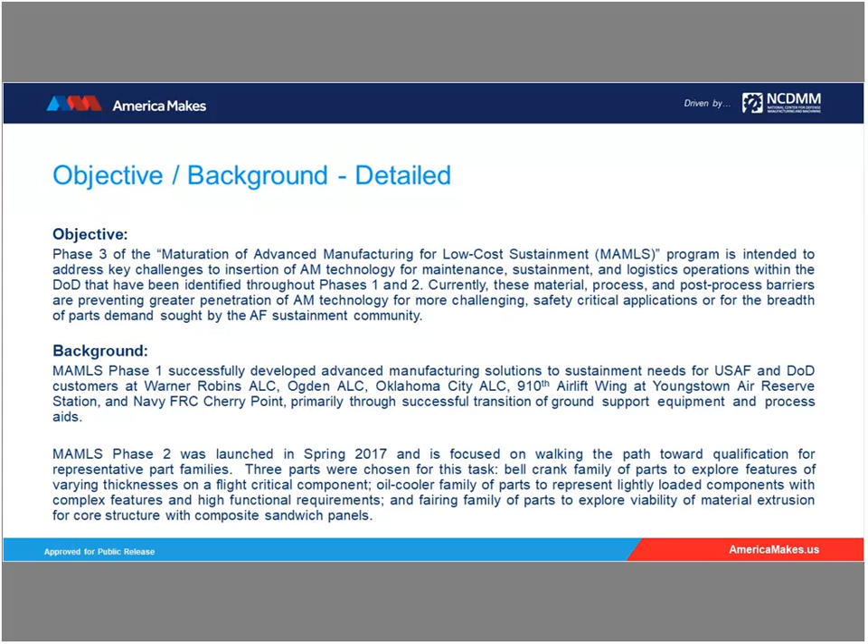All of this is really a baseline of what has been done to date, what the project is focused on, and just a couple more overall objectives.

The project is focused on demonstration of AM and advanced manufacturing technologies for replacement parts, for maintenance of legacy aircraft, things of that nature; identification of current technology and how it aligns to gaps within the maintenance, repair, overhaul, and sustainment communities, and what the transition issues are related to that, and finally how we demonstrate those technologies into that community.

So the key here for everyone who hasn't been engaged, and hopefully you pick this up through the evaluation criteria within the RFP, is that there's a need for your project concept to be related specifically back to a need within the sustainment community, within the DoD supply chain, something that will ultimately affect our ability to keep aircraft, vessels, and DoD systems up and operational moving forward.

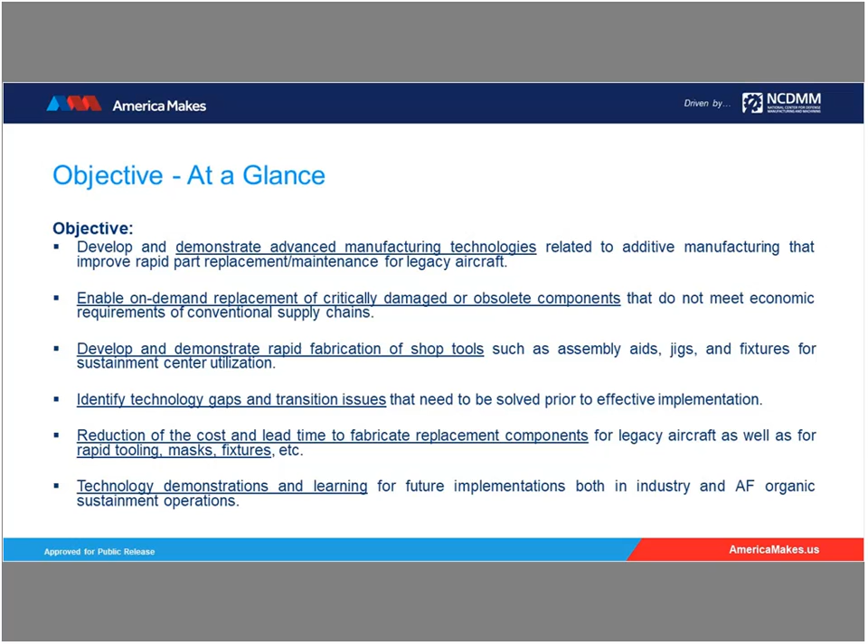So I will now go through the high-level technical topics. We'll address questions near the end, most likely, but we'll go through the individual technical topics first, primarily explaining the text buried within the RFP. We'll make sure any specific question that comes in is captured and documented so everyone gets access to the same information. Some questions may be referred back to the RFP for now, and if additional clarification is needed, it will be done via a written response.

The three overall topics right now are: topic one is feature-based qualification for, or using, directed energy deposition. The not-to-exceed amount of a proposed idea is $2.5 million in federal funding.

Topic two is understanding manufacturing realities of AM, specifically the effects of defects in powder bed systems, and that is not to exceed $1 million in federal funding.

Topic three is emerging process technologies for low criticality part families. Funding available for an individual award is not to exceed $600K. Each of the amounts in the right-hand column are not-to-exceed amounts for an individual project concept submission, and each does have a cost share requirement.

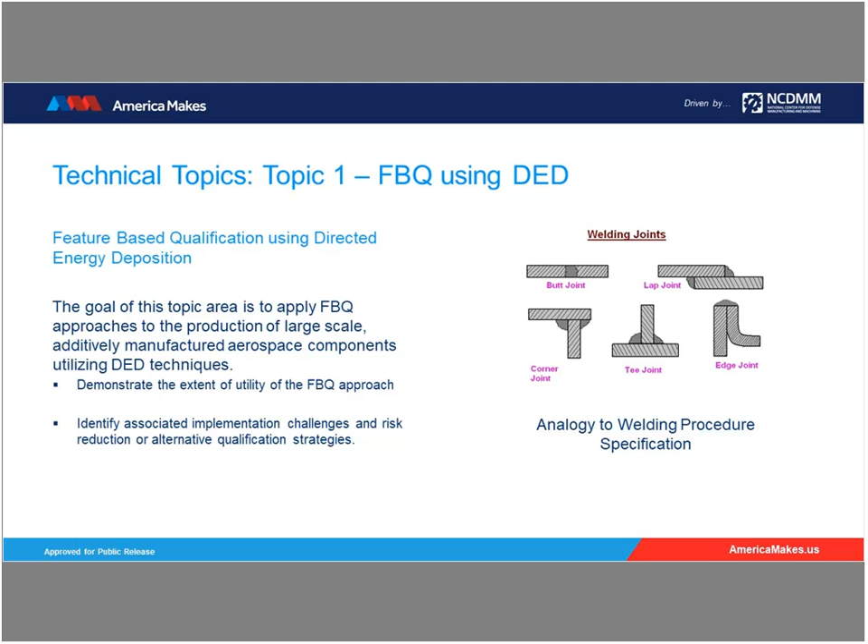There's some additional detail captured within the RFP. If there are more specific questions, you can type those on the right-hand side, and we'll make sure those get captured as answers that we share with the entire community. Within the next few days, we'll have our first list of questions out for everyone.

One note, and this slide, similar to this, exists for each of the 3 topical areas. We're going to put this out within the Q&A in the first batch that goes out. There is an alignment to the DoD roadmap for each of the 3 topics that has been captured by the Air Force. You'll see here in this first example reference to 4 different DoD AM roadmap elements that the effort is connected to.

This is not an exclusive list. This is not the only thing we're intending for a team to focus on, but these are tech elements connected from the DoD road mapping efforts that America Makes led about a year and a half ago, and this is a direct connection to that. You can see a reference to these specific roadmap elements within the DoD roadmap, posted on the America Makes website. There's a link there to the final report where you can get more detail about what each of these individual roadmap elements include.

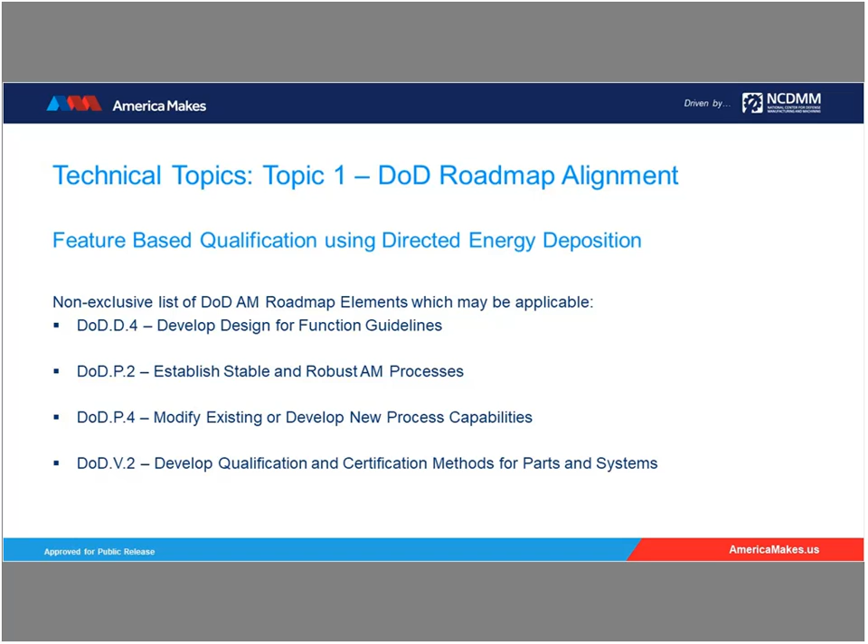So we have this for each of the three topics. I won't go into that detail on the remaining two.

The next topic, topic 2, on this slide labeled Effects of Defects, is really about understanding manufacturing realities of AM. We all know there's a variety of reasons that product or parts produced using AM are scrapped from time to time. There are lots of different root causes that could cause the need to scrap a part, from powder contamination, process interruptions, unremoved powder, rough finishes, volumetric flaws, lack of fusion, all the things we know could take place within a build.

Characterization of the flaws and the mechanical performance based on those flaws - we still don't have a great handle on what it means to have those built within a component. What it means to be located in a certain place, what it means to have defects in close proximity to one another. There's a lot still unknown in this space, and what we're really looking for here is to have the project teams putting forward proposals identify and quantify those effects of defects on mechanical performance.

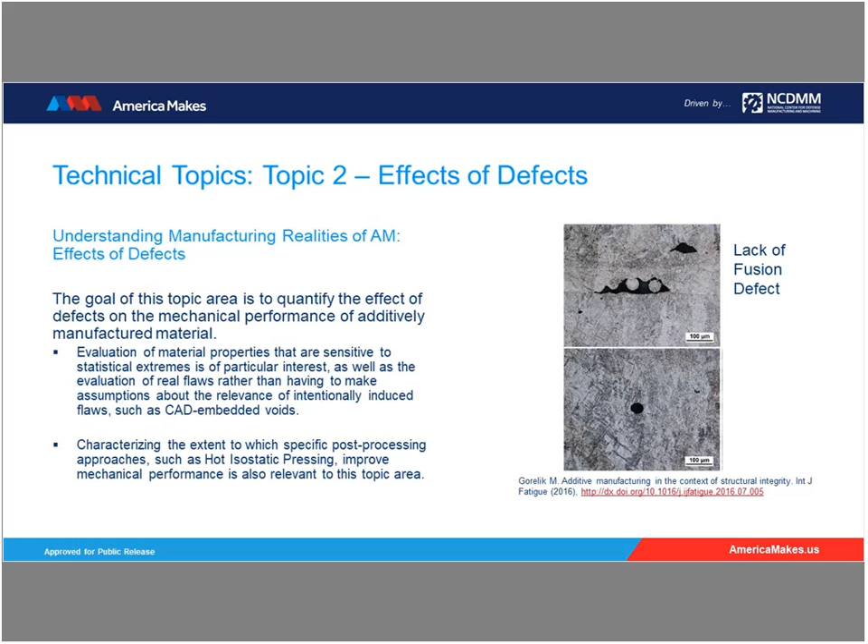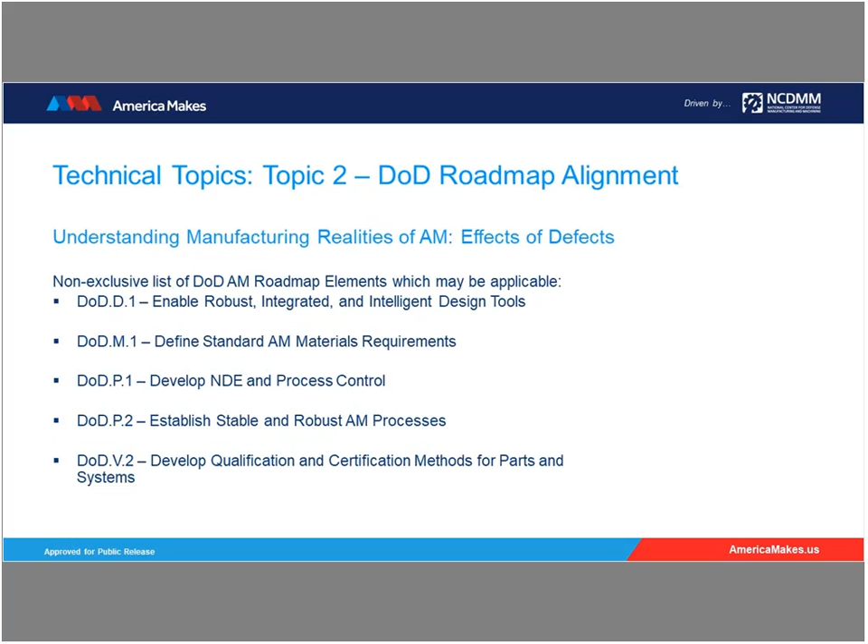Again, you'll see in this next slide - and we'll post each of these specific roadmap elements on the Q&A in the next batch that comes out - these are 5 specific roadmap elements that have been captured in the RFP.

The third technical topic is focused on emerging processes, and specifically we're looking for emerging processes for low criticality part families. We know AM is being utilized and has the opportunity to be implemented in a variety of different applications. In particular, AFRL is seeking to assess the degree to which new technologies are able to be introduced into parts of low criticality.

So in particular, there's a number of different things that have been called out here, but there are a number of the F42 processes that have not been heavily investigated through America Makes or through a variety of channels, that we would like to have teams put forward project concepts on. And this is probably the most open topic.

There's a variety of processes that people could propose against. It's really up to the team to identify the area of application, why it's of value, the potential impact. In particular, when you think forward to the full proposal phase, it's critical to understand how likely it is to transition the proposed idea to the Air Force, the organic base, and how likely it is to have an impact on the DoD supply chain.

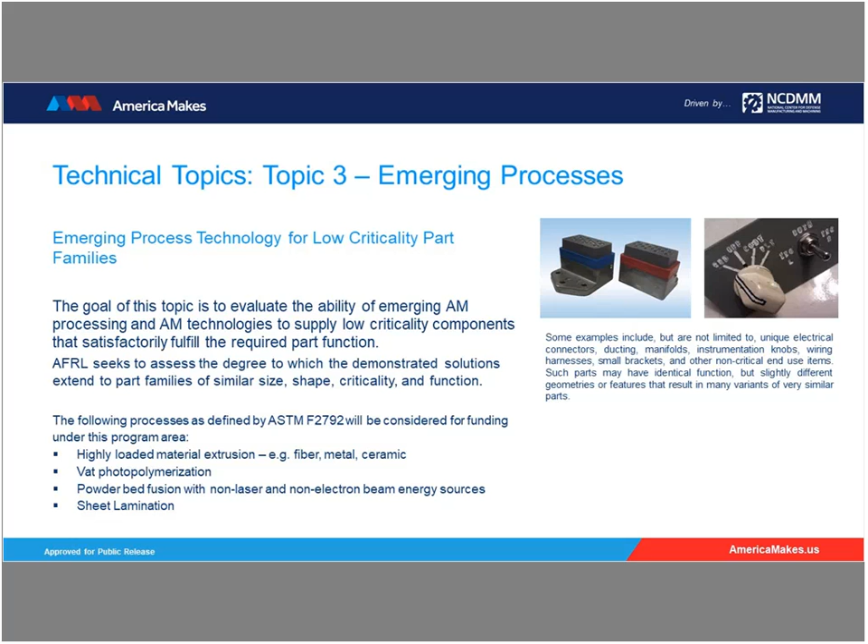So it's something every team needs to keep their head around as they're building project concepts, is what is the ultimate end-use application space, how does it tie back to the Air Force's needs, and how does it potentially impact the DoD supply chain. So in this topic in particular, a lot is on the table.

And we'll respond to that and post it for everyone to see. So I'm going to hand it back over to Erin, and she's going to walk through some of the programmatics about how this call will, some of the details of the call.

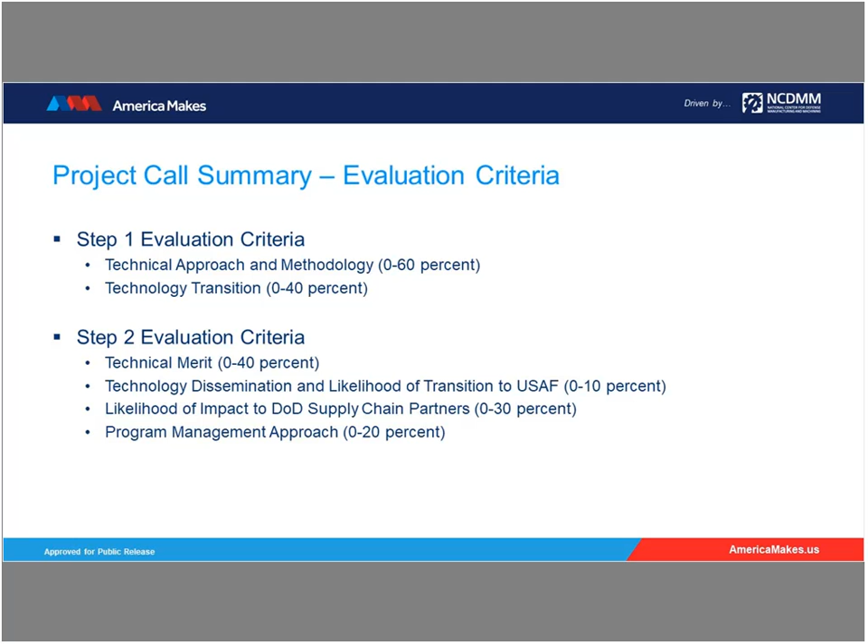So we'll move on now to the project call Exhibits, and we'll go over a few minor details with them. You'll find them attached to the RFP off the website, and these are all required when you submit your concept paper and proposal - actually it'll be just for your proposal.

So the identification of background intellectual property - you're going to want to go ahead and complete this. This will keep the consortium created IP separate from your background IP. This is under Exhibit 6 of the RFP, just in case anyone is wondering where that's at.

You also have the multiple submission summary. This is for multiple sources of funding. So if you plan on using any other sources of funding, we'll need a list of that, the organization, and the possible decision date. That's under Exhibit 6 as well.

We also need letters of commitment. So with your project teams, whoever the lead is and whoever your partners will be, they will need to submit their letter of commitment, which will need to be attached.

Publication of consortium developed IP - this will be a list of any and all types of publications you believe will be created during your project. This is important because whether it be an MMX or a TRX or teams writing to submit abstracts and presentations to events such as SFF, they need to go through our government partners, so they will need at least 30 days to review them. So if you can get an idea of what type of publications you believe will be created out of the project, that would be an excellent start.

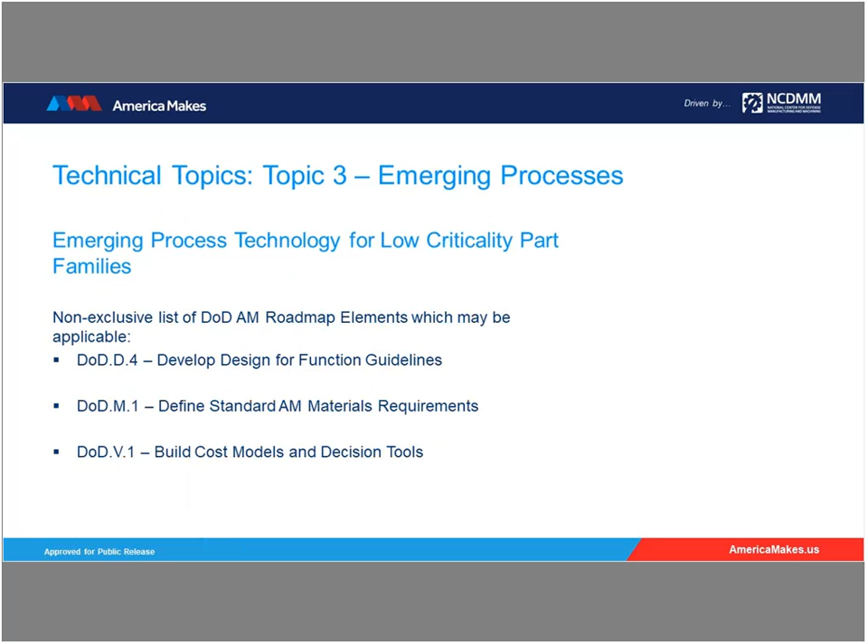Just a reminder that your concept paper is due January 3rd before 5 p.m. Eastern Standard Time. Any proposals or concept papers received after that time will not be reviewed or taken into account, so make sure they're in by 5 p.m. Eastern. Thank you all for your time today. We look forward to the concept papers we're going to receive. Thanks, everyone. Bye.